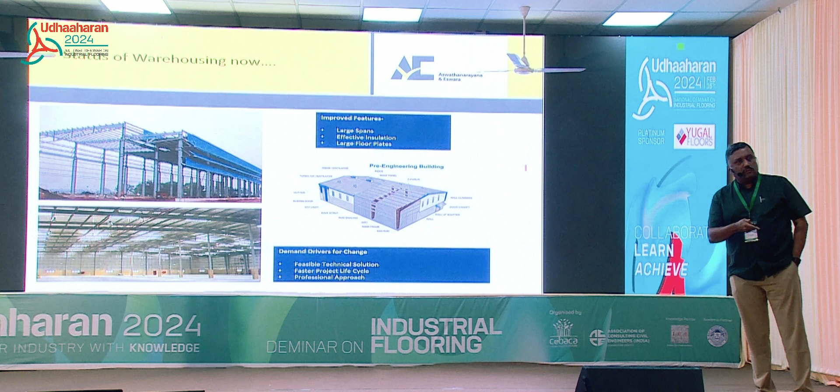What are the drivers of change? PEB has evolved from a normal steel building, it has become a feasible technical solution. Engineering has come in, projects are getting completed in a much shorter span of time. We are talking about building 2 lakh square feet in about 10 months time - that is how short and compressed timelines are. And there's a very professional approach to how PEB is handled. So I think it's about time we also professionally started approaching how flooring is being done.

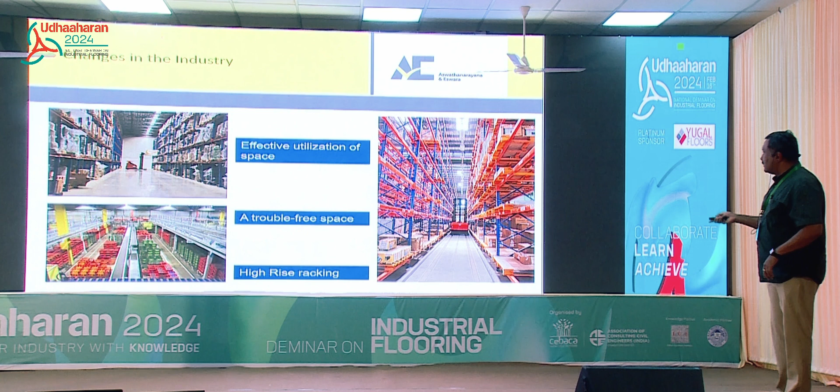This is actually one of our own projects, for a company called Redington - I don't know how many of you have heard of it. This was the first very narrow aisle, as it's called, project that was done for them. So high-rise racking, of course, this was the first project we did, I think in 2004 or 5. Subsequently, we've handled high-rise racking of almost 20, 30 meters also - that's much later.

So how critical has flooring become? It has become so critical that the knowledge partners, ICI, actually commissioned a flooring guide, titled guidelines on ground supported concrete slabs for industrial flooring and applications.

This bulletin was released in 2009 by several experts from academia. Dr. Ravindra Gettu from IIT was part of that, and we were part of that too. We contributed 2 chapters on sub-base preparation and on joints in this guideline. The guide covers the entire range that a floor is subjected to, from floor loading, design, maintenance, pretty much the entire aspect.

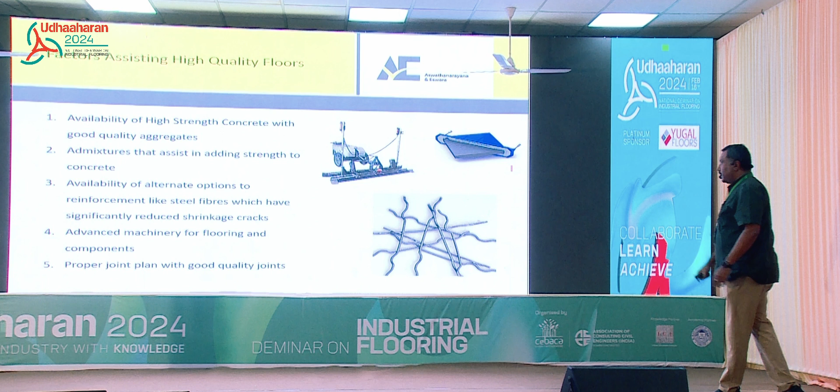So what are the factors assisting high quality floors? Availability of high strength concrete with good quality aggregates, admixtures that assist in adding strength to concrete, availability of alternate options like steel fibers, which have significantly reduced shrinkage cracks, advanced machinery for flooring and components, proper joint plan with good quality joints. These are things that have aided high quality floors. And last but not least, with thanks to people like Yugal Floors, we've got extremely good workmanship as well. They do fantastic work.

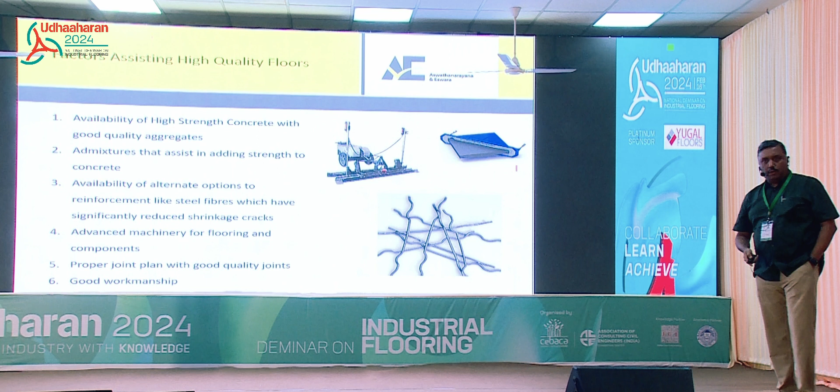So how is flooring in industry? What drives the flooring in industries? It is the most important part of the structure.

I remember one client, somewhere in Gujarat or Delhi, I don't remember. He said, sir, the building is a dead investment because it doesn't give any return to me. I want it to be as cheap as possible. But flooring, I don't mind you spending extra premium on it because it has to last for 50 years. So when a building is a dead investment, flooring is as important as, say, the electrical or mechanical system, because without flooring, he cannot manufacture. That is how critical flooring has become.

It carries more load, wear and tear than any other part of the warehouse. Generally in many industries, floors are loaded far higher than what they were designed for. This is probably not the case with warehouses, but in industry it's very, very common.

We have done plenty of industry work, like for instance forging industry. We have designed flooring for 5 tons per square meter, 10 tons per square meter, 300, 400 mm thick floor with double mat and everything. Then I go for an expansion 2 years later, I come back, there's a huge press sitting right on top of the floor. I don't even know when it was brought in. It was not part of the original brief given.

But he says, the floor is fantastic sir, see it's taking this load. That press weighs about 300 tons, but it's standing on that floor. So we, as designers, have to take cognizance of all such variables that may come in even after we've moved out of the project.

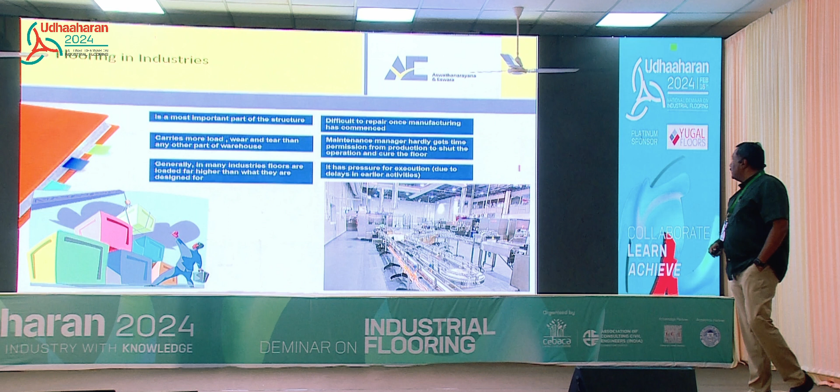The maintenance manager will hardly get time or permission from production to shut operations. I think one of the speakers earlier said the same thing. There's pressure of execution due to delays in earlier activities. So the PEB is complete, the civil contractor is standing there and says, I need the flooring, I need you to start it tomorrow. So the roof is not done, it's exposed to the elements, but do the flooring immediately because I need to start moving my machinery in.

He is subjected to harassment. I myself as a consultant harass the contractor because he has to get the flooring done, but I don't have a choice because the client is harassing me. So we're all in the same vicious circle. We end up doing the floor and we hand it over. Eventually, if everything goes well and all the parameters are good, then flooring is fantastic for its life cycle. Otherwise, we run into problems here and there. It always happens.

So, what are the important aspects of flooring design? Industrial floor needs to be designed as carefully as the load that it's going to take.

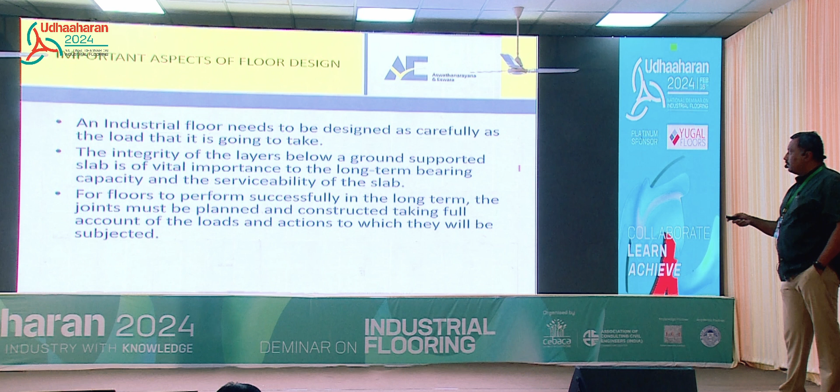Integrity of the layers below a ground supported slab is of vital importance to the long-term bearing capacity and the serviceability of the slab. For floors to perform successfully in the long term, the joints must be planned and constructed taking full account of the loads and actions to which they will be subjected. And last but not least, floor tolerances.

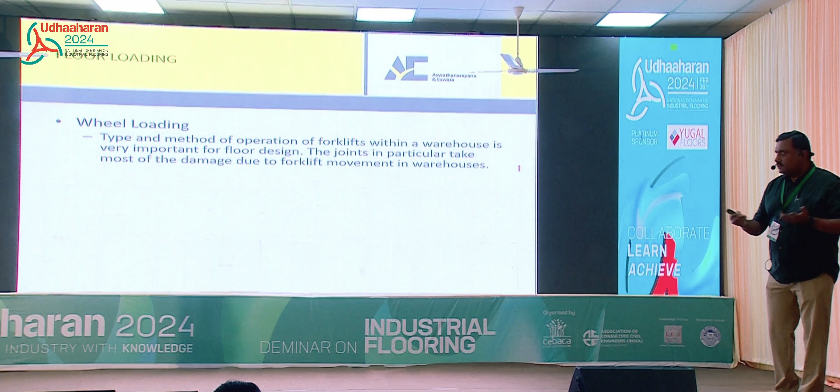So when you say floor loading, typical wheel load, say industrial floor will have forklifts. Wheel loading, type and method of operation of forklift within a warehouse is very important. The joints in particular take most damage due to forklift movement. So this is a critical loading.

Rack weights. So like I said, we designed racks for 22 meters high and things like that. You get point loads in excess of 300-400 tons. So when you have to do that sort of flooring is a very, very critical aspect. And the problem with racks is they come with a very, very small base plate. They only come with say 600 by 800 or something like that. So there's a very, very heavy impact point load that comes on the floor.

Future rack positioning, if possible, should be taken into account. Generally very, very difficult because we don't know how the industry is going to scale up. If possible, this would be extremely good parameter to have with us.

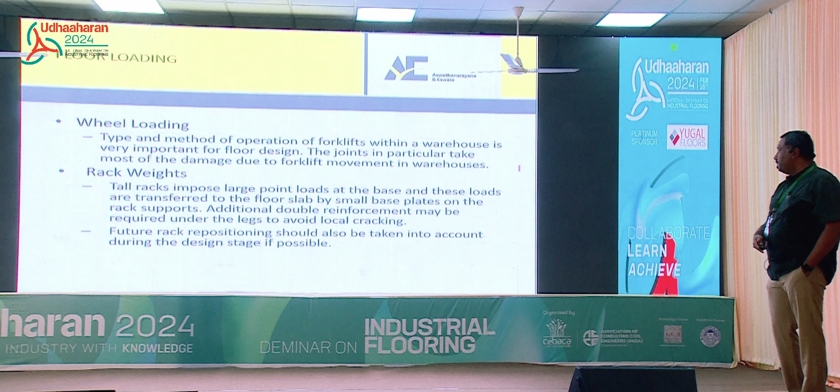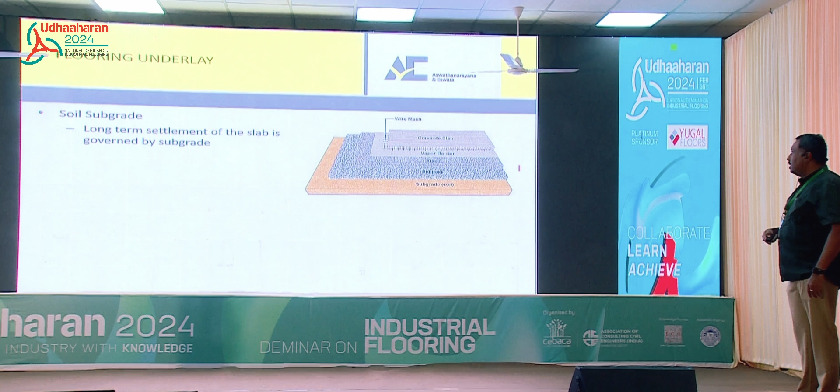Flooring underlay, all of you know this. Subgrade soil, long-term settlement of the slab is governed by the subgrade. There is potential for long-term settlements to be larger than elastic deflection calculated. So this concrete slab is designed for a certain amount of deflection. If we have not designed the subgrade properly, the plastic settlement of the subgrade could be more detrimental to the floor itself compared to the concrete topping.

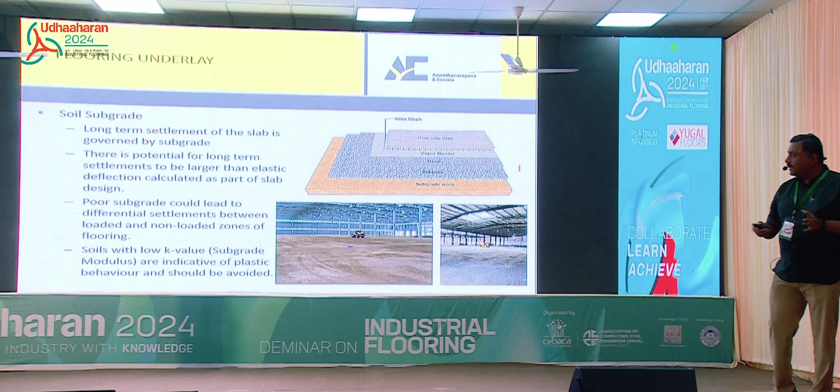Poor subgrade could lead to differential settlements between loaded and non-loaded zones of the flooring. And soils with very, very low K value, which you can get using a CBR test, are indicative of plastic behavior and should be avoided. So low K value soils typically are avoided. You go to Gujarat and other areas, you get very, very black cotton clayey soils which are very, very poor. If you can avoid those kind of soils, it will be fantastic.

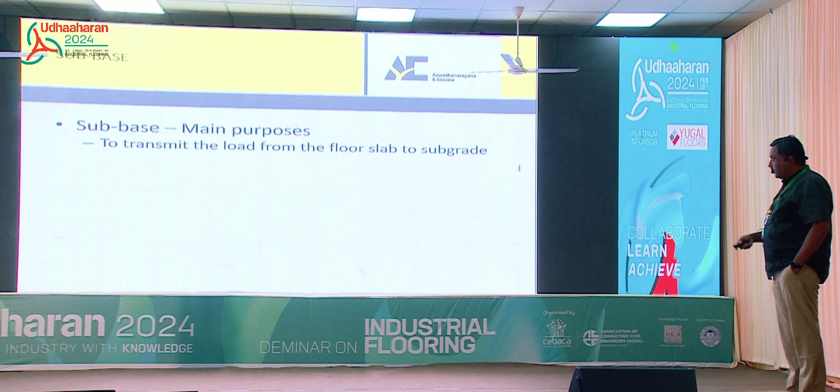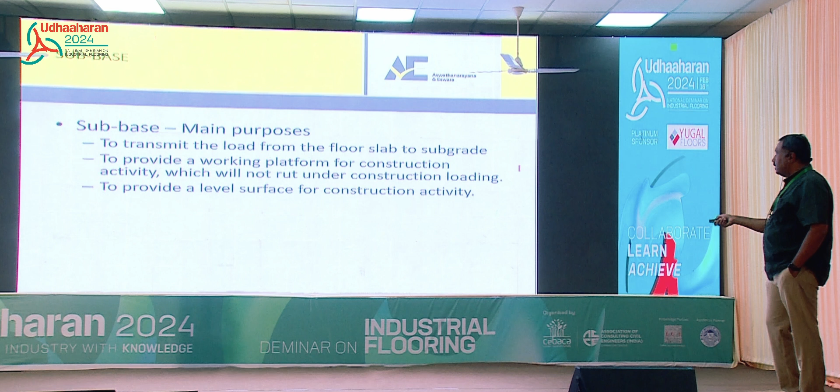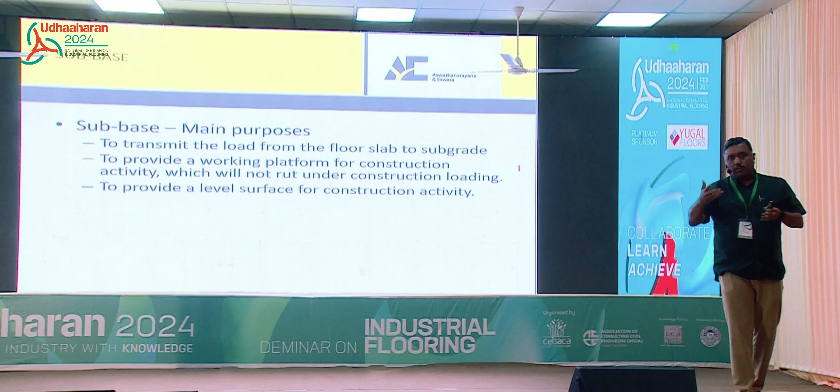Comes to subbase, which is the next layer. Main purpose is transmit load from the floor slab to the subgrade, to provide a working platform for construction activity, provide a level surface for construction activity. This is extremely critical because if you have done the industry, the PEB supplier says, I need a level floor. Kindly give me a level floor in which I will get my boom crane or my tower crane, whatever it is, to come and erect the PEB structure. Very, very critical.

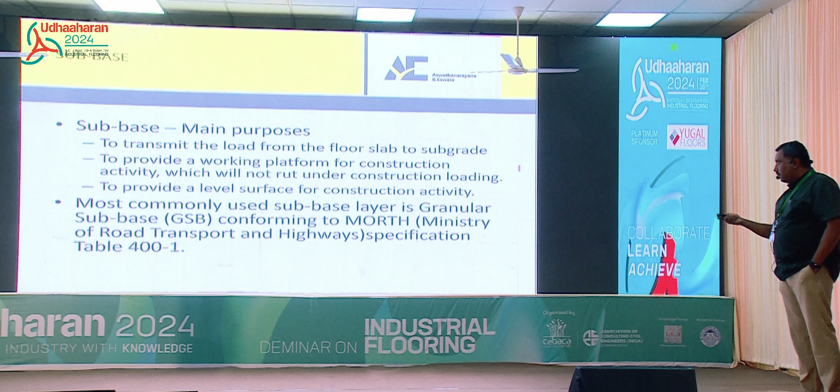I'm sure all of you are aware of it. Granular subbase is what we do. I'm sure most of you are conforming to the same standards.

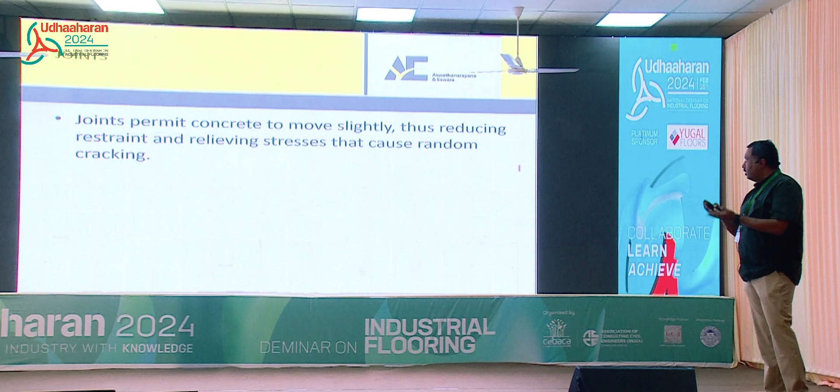Last critical part is the joints. Concrete joints allow the concrete floor to move slightly, especially when subjected to wheel loads. Flatness of the floor. And the types of joints, isolation and expansion joints, construction joints, and contraction joints, basic three ones that we follow.

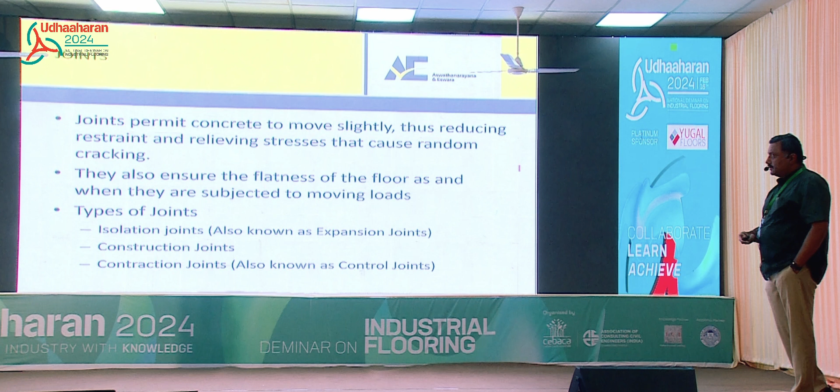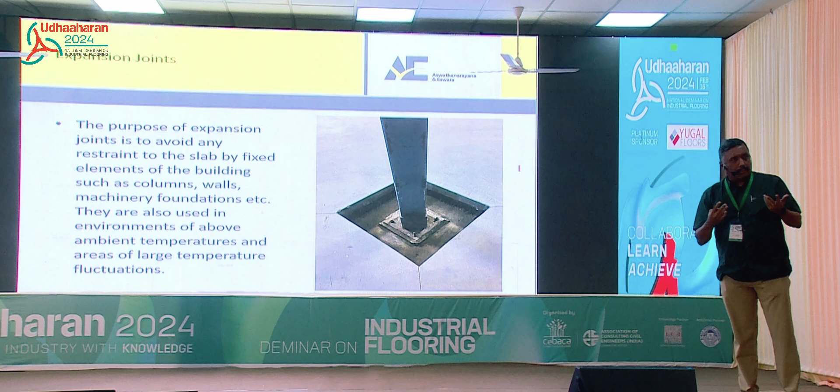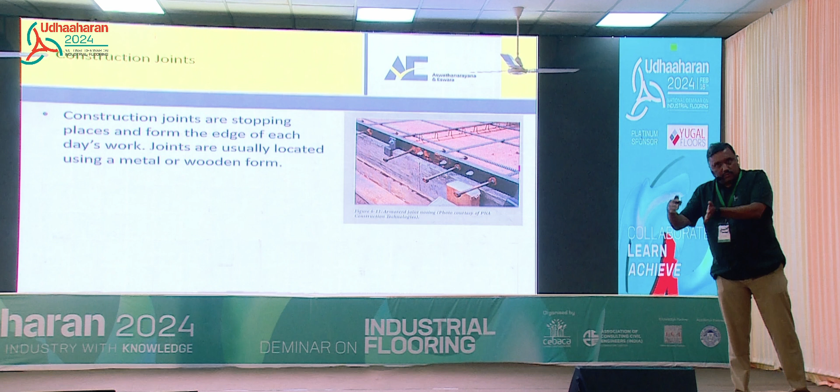These are construction joints. They are the places where you stop the work. So you poured say 500, 600 square meters of concrete a day on the floor. You want to do the next of it next day. Then obviously you leave a construction joint like this with say typically using a metal form or a wooden form. And this is how the edge of a construction joint would be once you remove the formwork, so that the joints are all aligned. So you see all these plate dowels that are left in place. They're all aligned and they butt with the next construction very, very well.

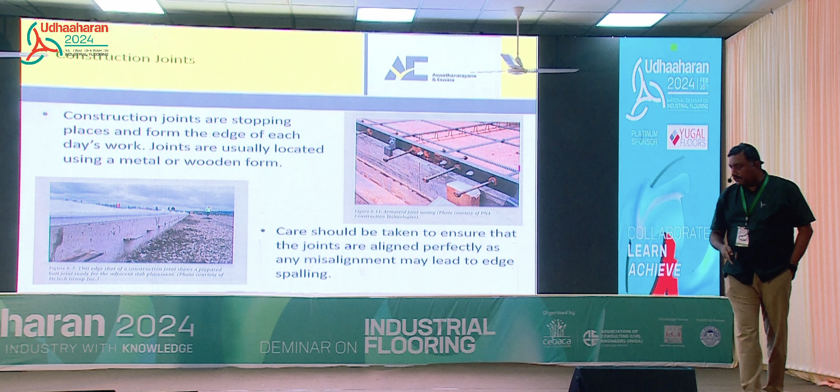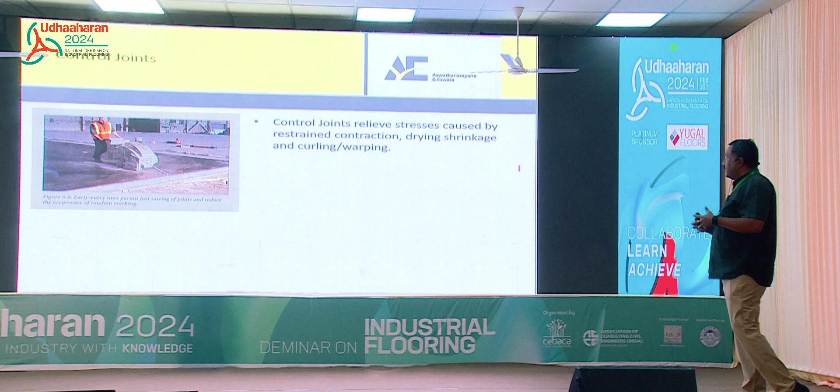Control joints. Control joints relieve stresses caused by restrained contraction, drying shrinkage, curling, and warping. So with proper depth, spacing and timely installation, these joints will help control random cracking. If you see this, the crack has happened right below where the saw cut has happened. So it doesn't happen randomly in other places and your floor is still secure. There is no issue with the floor.

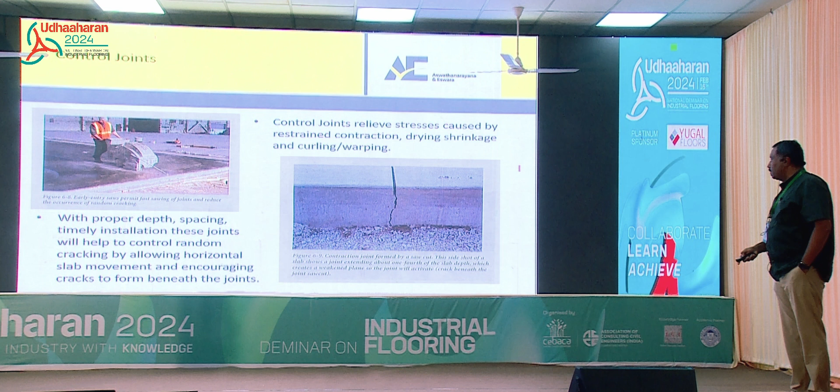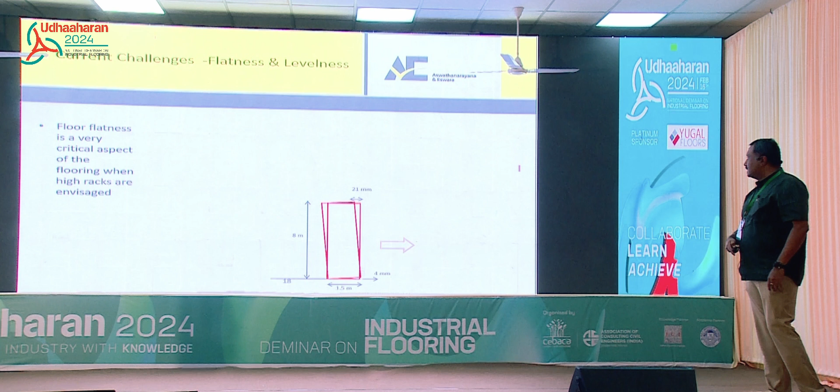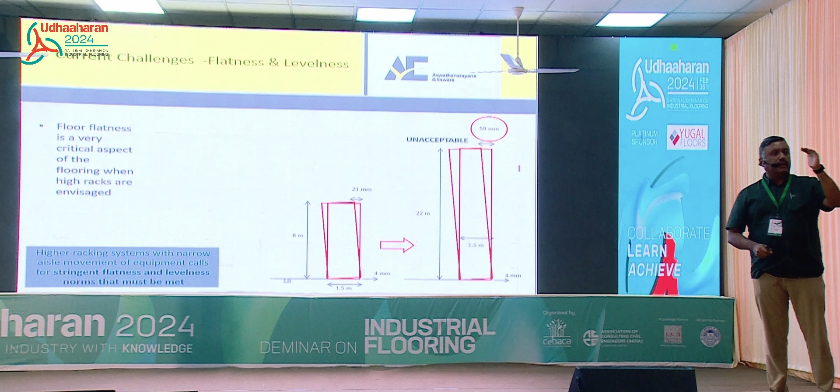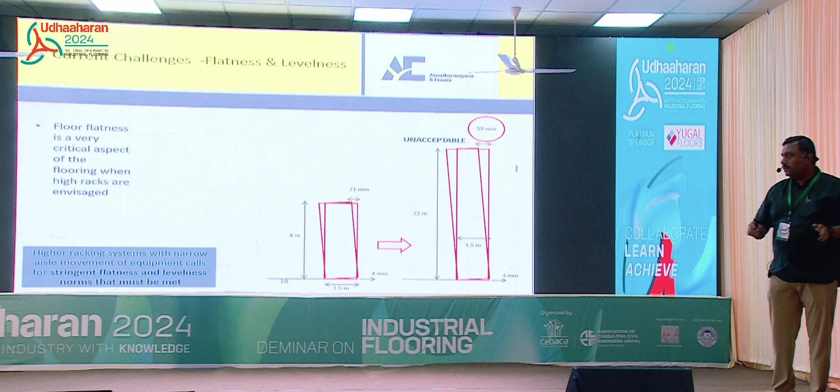Whereas if you go to high racking systems, like ASRS, with very narrow aisle equipment, they're very, very sensitive because they're all laser guided. So if you have the same 4 mm out of alignment here, it goes to 60 mm on top. So if you have a reach truck or a VNA, the moment he's going, the rack will hit the VNA. He can't even load or unload from that place. So this is a definite no-no. 60 mm out is definitely not acceptable in any floor. Higher racking systems with narrow aisle movement of equipment call for stringent flatness and levelness.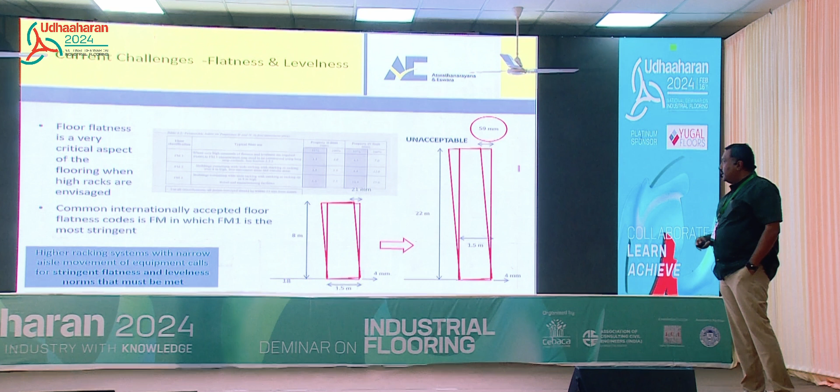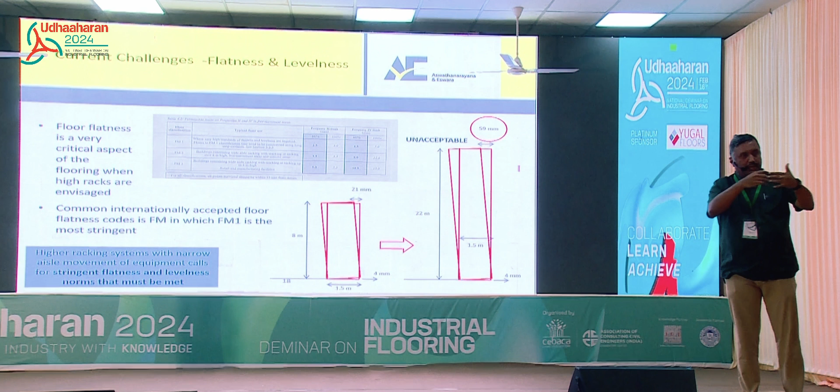So what do you do? There are codes available for this. We design for the common international flooring code called FM, FM1 being the most stringent. We have handled about 20 or 25 FM1 projects. Very, very critical, laid under extremely cautious conditions. We cordon off areas where we lay FM floors. I'm sure Yugal Flooring will have an idea of it. This is the code to which we design, and it actually needs a lot of care to do a floor as per FM1 standards.

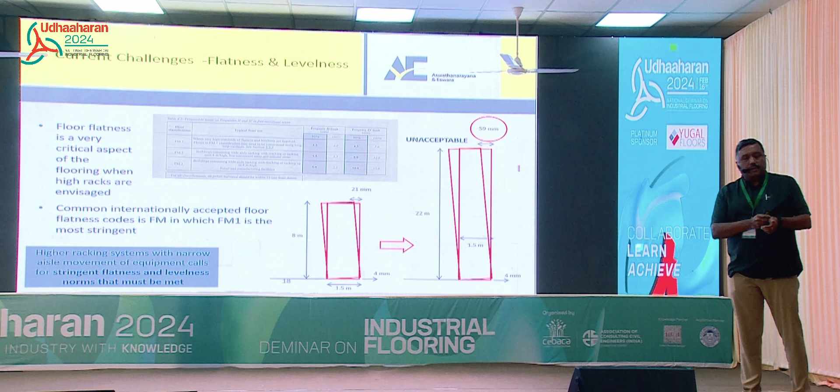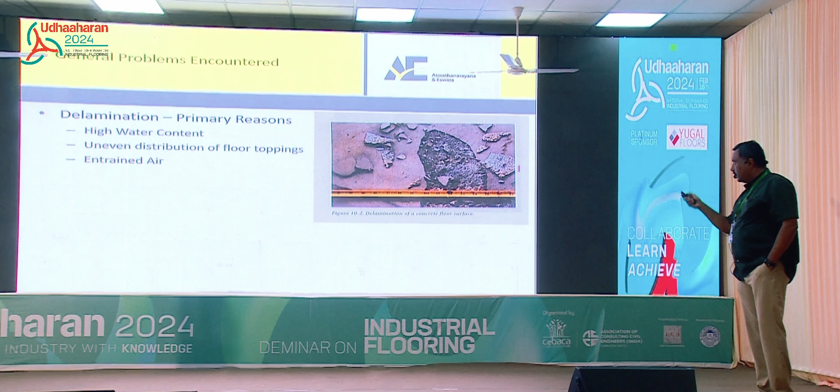General problems encountered. I'm sure most of you would have seen this. Delamination. What is the reason for it? High water content. In the batching plant, in quality control, though there's a water cement ratio on the chart, what you actually get in RMC is a little different. Uneven distribution: we all add floor hardener, a dry shake powder that we trowel in. If that is not laid properly, you get these sorts of cracks. And last but not least is entrained air. When you pour it, there's air inside, those bubbles group together and they spall. When they spall, you start having cracks like this.

So this is basically what I wanted to touch. Like I said, there are experts from this industry. We know a lot about floors, but flooring is not our only business. The building business is ours, whereas flooring is their only business. So obviously they possess a lot more knowledge, and I would now leave it to the panel to discuss more on the flooring here.